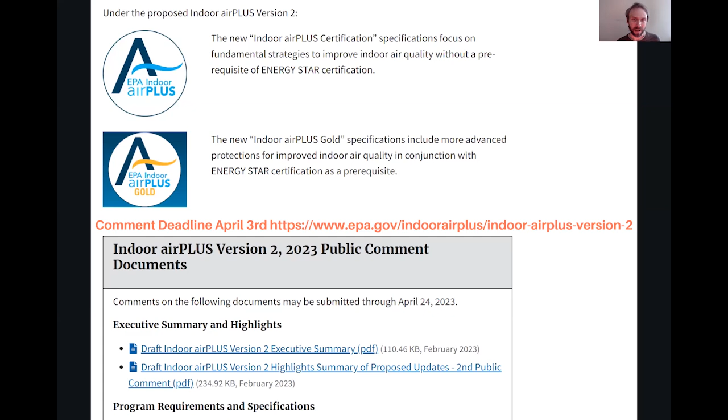And also that's going to impact achieving the DOE Zero Energy Ready program and achieving the Inflation Reduction Act dollars if you're trying to get those. So go make a comment and go learn about that now. And then also, as a reminder, in order to get Zero Energy Ready certification, you need to be collaborating with an energy rater, a certified energy rater.

There's 4 different entities. 2 of them are special in the country of California, if you will. And then the rest are national. And so you need to collaborate with one of these certified raters through one of these entities, depending on whether you're in California or national. And then also typically the builder needs to be certified as well, though that's a much lower bar than the rater, and we'll talk a little bit about that too.

Now, if you're utilizing these programs for the green certifications, such as LEED, one thing you'll note is that there is an addendum that had been issued several years ago through LEED that basically automatically grants 15 energy points to anyone who achieves the Zero Energy Ready certification program. And on top of that, they also grant several prerequisites that get met automatically just by achieving this certification, as well as additional points. So minimum energy performance, superseded, right? We meet that. Education of the tenant building manager.

There's a component of that built into Zero Energy Ready already. The efficient hot water distribution system is built right into the Zero Energy Ready certification program. Active solar ready design. That's what this program is all about. Having that credentialed HVAC contractor, again, the energy use, and then also you get an innovation credit just for achieving this. So there's multiple points there. And there's a few more as far as Indoor Air Plus, which we'll get into.

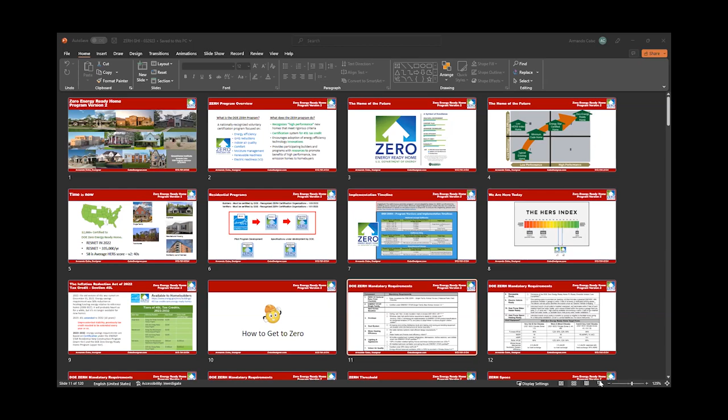So let me share a screen. Can you see it, Brett? There it is. I see. Well, I see all your slides. Yeah. Okay. So here, hold on. Sorry. Okay. Are we there now?

There it is. Okay. So my presentation slide actually is to tell folks that you can design a zero energy home for any climate zone, any style, any size whatsoever. Fortunately, for version 2, they took out the size adjustment factor. So now we can certify and register houses that are fairly large. So what the program is all about is energy efficiency, greenhouse gas reductions, indoor air quality, comfort, moisture management, renewables, and electric readiness, which is a big part of the new version. It also recognizes high performance.

Now with the tax credits that just got passed a few months ago in Washington, all the tax credits got extended, not only for new construction, but also for retrofit. So we'll talk briefly about all those things. It also talks about innovation. We get a chance to come up with new products, new ideas, new systems, new things.

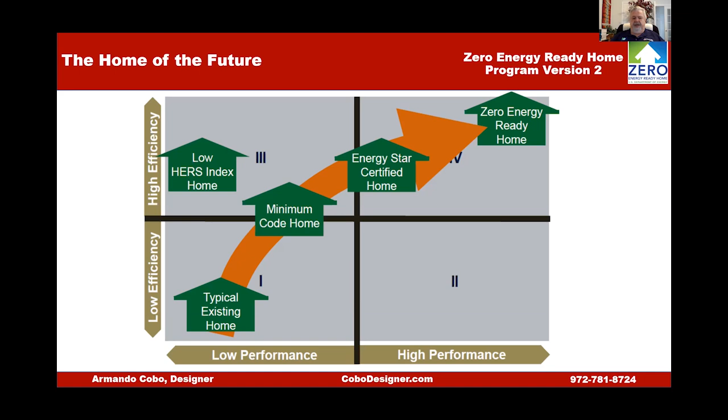So having said that, we're still looking for a better environment, a healthy environment. We're looking for more comfort. We're looking for advanced technology, being more efficient, have better quality homes. And of course, better quality homes means more durability. So we're trying to start with the existing stock that right now is pretty low on performance and efficiency, but we're trying to move the needle up and up and up, like most green programs. But I think we have a really good system with the Zero Energy home.

Last year, there were almost 12,000 homes certified to the Zero Energy Ready program. RESNET has come up that there's an average of about HERS 58 for all the scores, and Version 2 is now requiring to be in the 40s. So we can tell that new homes are getting better and better as we're improving the quality of the homes. The Zero Energy program is basically designed for single families and duplexes, townhomes. That's what it is so far right now.

As far as manufactured homes and multifamily, the programs are being developed, the guidelines are being set up, and so forth. So we're basically going to concentrate on the movement from Energy Star version 3.2 to version 1 of the Zero Energy program, and then also for now version 2. So we'll hold on manufactured homes and multifamily versions until they come up with those programs, and they'll have their presentations ready for that. So as we know, different versions are being applied today in some states.

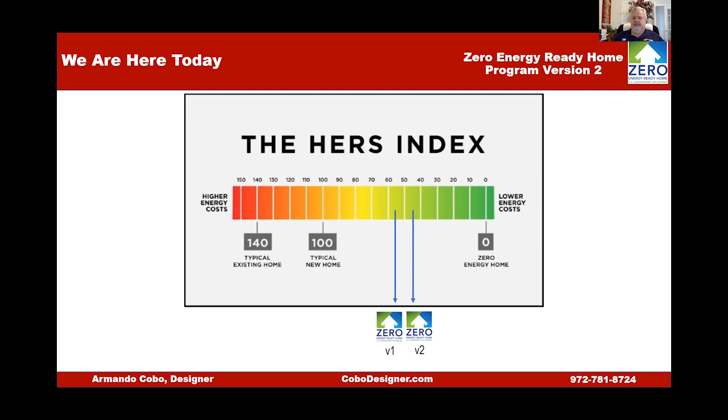Any program where the building permit is after next January of '24 needs to automatically go to version 2. So there are also similar requirements to California, and right now we know that the HERS score required for version 1 is somewhere in the middle of the 50s. And we're improving to somewhere in the middle of the 40s, from low 40s to high 40s. And so it makes it easy to get there.

As Brett said, some of you guys are already in the 40s. That's excellent. I vouch for people that do those kinds of things, because just doing the right thing, just sealing the envelope like we're all supposed to do regardless of what construction we're doing, you pretty much can get a HERS 40, and you pretty much can get below 3 air exchanges at 50 pascals. So just doing the right thing, we can get there.

One of the good things about the Inflation Reduction Act that got passed a few months ago was that in the old version, we had tax credits for energy efficient homes, and we also had tax credits for solar and renewables and so forth. Everything got extended 10 years. So there's no such thing like we had in the beginning, where it was only a few years and then it had to be renewed. So at least we know that we have 10 years for a full tax credit, and then it kind of fades away in year 33 and year 34.

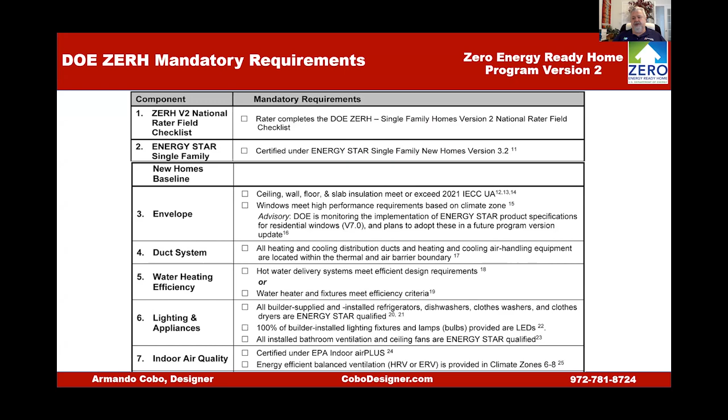If you happen to be designing and building a house in an area where there's high humidity, especially in the shoulder seasons when you don't have the air conditioning controlling the humidity in the house, having an independent, separate dehumidification system in a house is a big plus.

So renewable ready needs to be done there. You need to have also at least one electric vehicle charger ready for it. So those are things that we need to start thinking about as you add to it.

Here's the heat pump water heater ready that you need to have in a home or in the garage, an area specific for a heat pump water heater if you need to install it in the future.

Also the HVAC system improves in efficiency, in how much SEER or heat pump efficiency, the boilers and so forth. All these requirements, I believe the PDF was sent to Brett, and he should share it with each one of you. And if not, you can go to the Zero Energy Program website and download all the requirements that need to be done.

Again, insulation is also improved tremendously. You really need to pay attention to that, because now pretty much everybody's going to have to start using outsulation or rigid foam on the outside, continuous insulation.

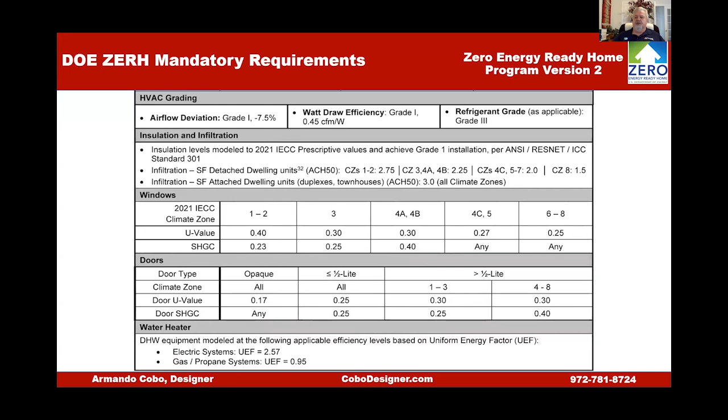Doors are also specified for what needs to be done. Here down below is water heaters for electric water heaters. And even if you still want to use gas, there is efficiency improvement for water heaters. All ducts in the conditioned spaces, and as I said, also lighting and appliances, it's all 100% high efficacy.

So in a nutshell, what is it that we're trying to do? We're trying to improve the building envelope. We're trying to improve moisture protection in a house. We're trying to improve comfort. We're trying to improve better indoor air quality. That is a huge thing.

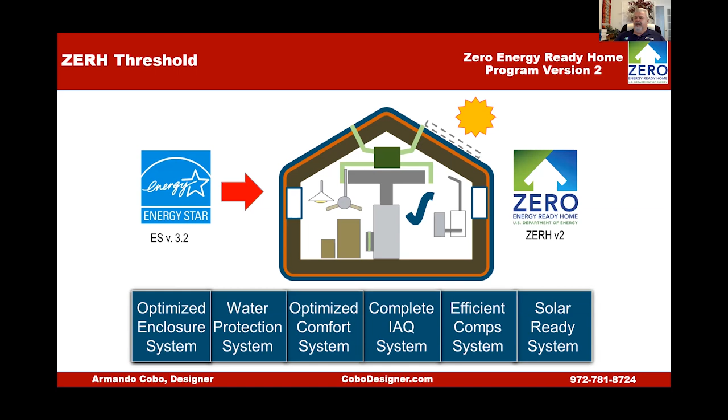We know that for the last 20 years, the rate of asthma in children has doubled. So that is a big thing. Efficient components on the rest of the house, and then of course solar ready.

So what we're doing is we're taking the Energy Star 3.2, we're getting to a tighter building envelope, and we'll see how tight we need to go in a minute, but we need to improve performance, and then we come to zero energy. That's how we need to do it.

We need to do a continuous air barrier, insulation barrier, thermal barrier, all that, all the way around the house. Again, the water protection, we need to make sure that we deal with better products, better systems on how to use it.

Pretty much every single house that I'm designing right now, we're using rain screens. There's different options for different products. I've always said not every good product is applicable to any installation. So make sure that you marry the correct product to the correct rain screen that you're trying to use.

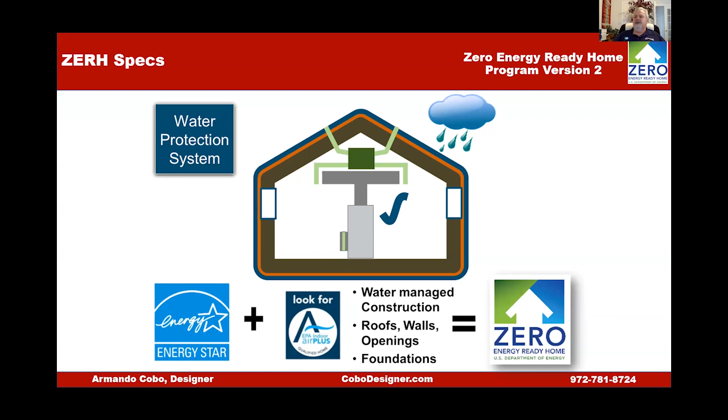Whether we use stucco, you may want to use Benjamin Obdyke's rain screens. When you're using siding, obviously you may want to use, say, 1x4 rain screen. So all those things, it just needs to take into account better sealing, better waterproofing, better management.

Again, appliances. We take Energy Star appliances. We use ceiling fans, exhaust fans, water heating. All this, we're going to use much more efficient equipment. We're going to add lighting. We're going to have hot water distribution. This is a big thing too.

Now we're going to have to start either bringing all the rooms that have water use, like bathrooms and laundries and kitchens, as close to each other, and hopefully we can use, say for example, a manifold. So in big houses, we don't have a choice. Sometimes we have to put recirculating pumps, and then that becomes now an issue.

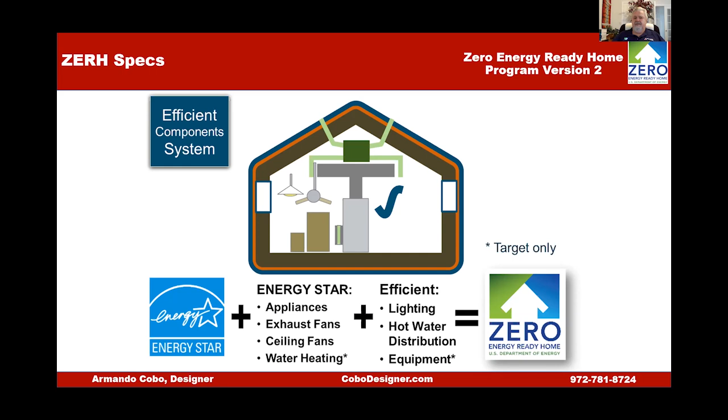What water heaters are we going to use? What water heaters work with water pumps, and do they need to be on demand or not? And so now it becomes that we're going to have to start thinking about what systems we use on the house.

Same thing when it comes to the renewables, whether we're using solar panels, whether we're using solar tiles, whether we're using battery systems, whether we're using generators.

Not all batteries can be charged with a generator. Not all batteries are the same - some you have to replace every 7 years, some every 10 years, some cost $5,000, some cost $20,000. So all those systems need to be figured out. What type of panels you're using on the house, if you're using a smart panel or not, if you need automatic disconnects or so forth - all these things need to be thought out ahead of time.

I actually have a thing I try to talk to my clients, the homeowners and the builders, about - before I start drawing a line on AutoCAD, I want to know what systems we're going to use on the house. It doesn't have to be 100% accurate, but it gives me an indication of what type of wall assemblies I'm going to use, what type of roof assemblies, am I going to use floor trusses, am I going to do a basement, a conditioned crawl space, a conditioned attic or a ventilated attic. All those things need to be settled before you start designing a house.

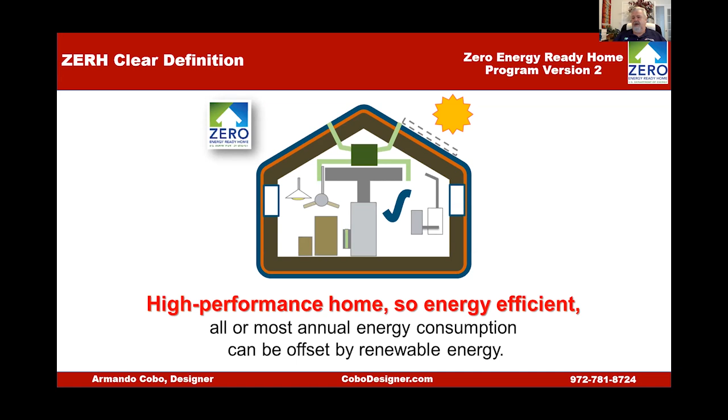One of the things I really like about the zero energy home is that it doesn't require a specific wall assembly or roof assembly - all you need to do is make sure it works for the program. And so this is where we're moving from and to.

Obviously, Energy Star started back in the late 90s. Energy Star 3.2 was just recently released. Zero Energy started about 10 or 12 years ago.

We're doing a house right now where the homeowners want four EV chargers. So you need to think about that, because each electric vehicle charger is going to be drawing somewhere around 4 kilowatts. Not that you're going to run them all at the same time, but there could be the possibility that at some point you may need to. So you need to have all the power available for those requirements.

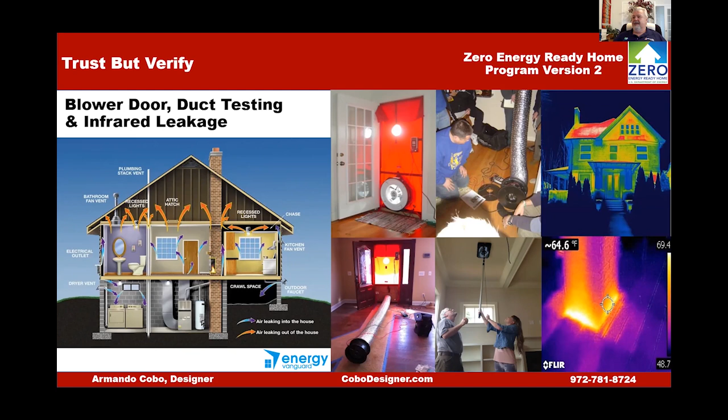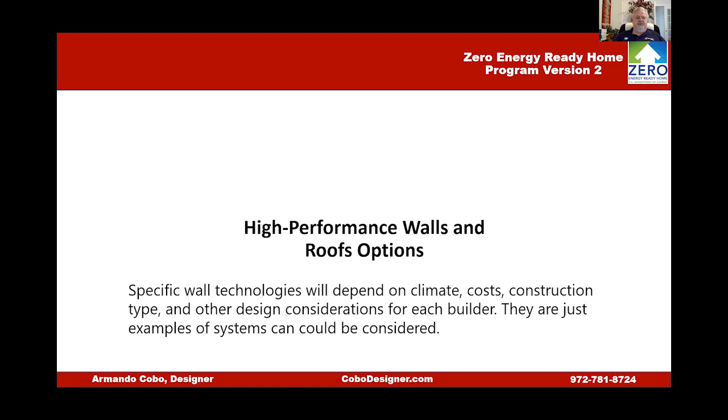So what are the options that you have? Here we're going to show different typical wall styles that are used around the country. Doesn't mean those are the only wall sections you can use, but probably the most common one is 2x4 or 2x6, 24 inches on center, using rigid foam insulation on the outside.

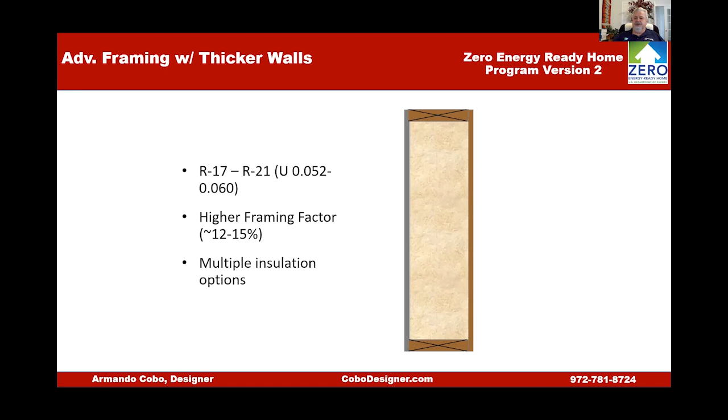You can also use 2x4 stagger studs on 2x6 or 2x8 plates. You can use insulation in the exterior sheathing - having continuous insulation is the way to go. Take a 2x4 or 2x6 wall insulated only on the inside - by the time you add the framing factor, instead of having an R20 or R21 wall, you only have an R14 or R13. So continuous insulation adds anywhere from R4 to R7 on the outside of the whole assembly. This is the typical insulation that goes into a 2x wall, whether 2x4 or 2x6. The framing factor reduces the R value of the wall.

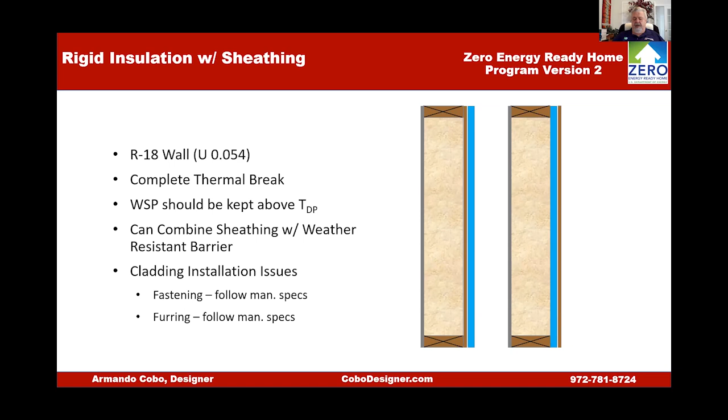Another common way to do it is to use structural insulated rigid foam. It allows you to have that rigid foam on the outside, but then you need to have some bracing included into the wall, which adds labor and so forth. I happen to like the system with rigid foam on the outside of the sheathing. Some folks, and it's becoming popular, use products with rigid foam inside of the sheathing, but to me, structurally, I just feel better having the OSB or plywood on the warm side of the wall.

Also, using structural insulated panels is a common system. I don't use it hardly ever - I tried it for a few years. It's a good system, but you really need to use specialized installers, guys that know what to do, who've dealt with the system for years, day in and day out.

Any type of leaks becomes a big issue later on. So to me, it is a good system, but you really need to use people that specialize in the design and installing of the system.

The same thing with ICF, insulated concrete forms. It's a great system, and if money is no object, it's probably one of the best systems that you can build a house with. It usually costs quite a bit more than what the salespeople tell you, but it is a great system.

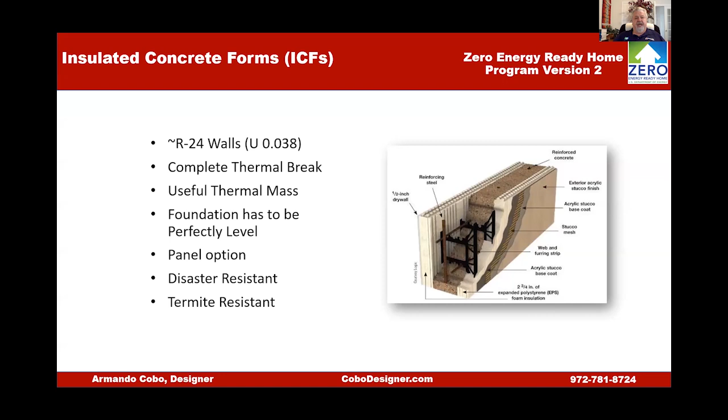Again, you really usually need to use contractors that are specialized in this. Even though some of these manufacturers say that anybody can do it, that's just like anything else. Sometimes good products with bad installations make a bad decision.

So double stud walls are fairly common in the Northeast. We don't see that much down here in the South. I don't know much about it other than what I read in websites and books and so forth, but it is a good system as long as you build it correctly.

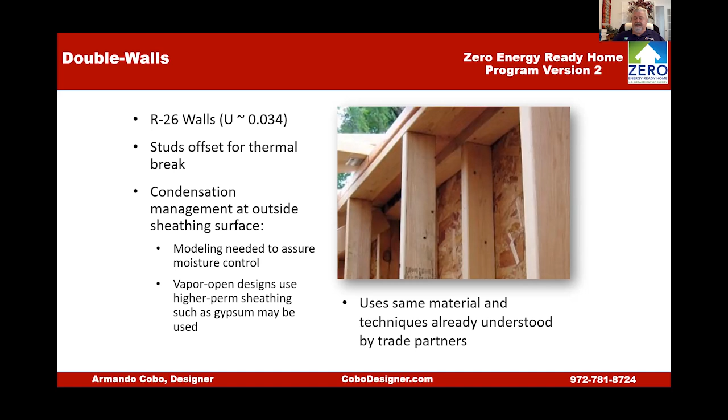So there are different options that you have for walls, floors, ceilings, roofs, all that. As long as you do it right, as long as you plan ahead, the moisture management, the permeability - I know that many of us cannot afford to use WUFI analysis on every project, but ASHRAE Fundamentals is something that is available to anybody and it is free.

So why don't you really pay attention to what type of systems you're using on a house, especially on custom homes. Make sure that you're using the right product for the right application and the right installation instructions.

Heel framing - the codes are now jumping quite a bit. In climate zone 0, which is probably in the Caribbean or somewhere, and South Florida is climate zone 1, they stayed at R30 in the ceiling. Climate zones 2 and 3 have jumped from R38 to now R49. Climate zones 4, 5, 6, 7, and 8 are R60.

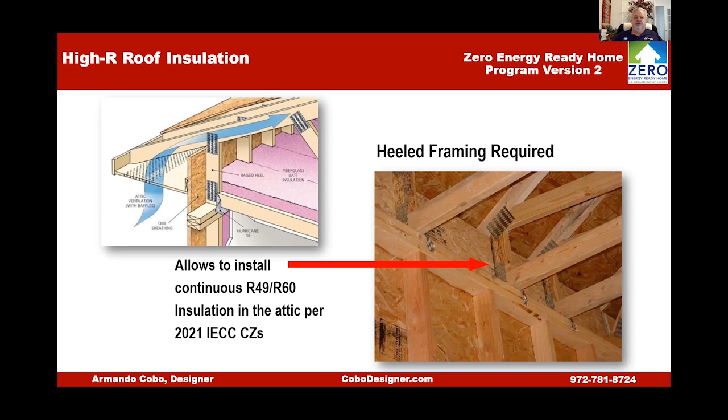Even if you're trying to do continuous insulation, where if you're at R49, continuous insulation will bring you to R38, or if you're at R60, continuous insulation is R49, you still are going to have to use heel framing. I believe the code needs to address this on roof framing, that pretty much every single roof we do today needs heel framing.

This is what I was talking about. So it's pretty important to know now, especially starting in climate zones 4 and higher, think about this.

Just for condensation value, the impermeable insulation that we need to use starts at a minimum of 3 inches, and every climate zone it goes up another inch. So if you're in climate zone 6, you're looking at 5 inches of rigid foam on top of the roof decking, or closed cell foam sprayed under the roof decking if you're using a conditioned attic type of assembly.

So I'm always thinking, what is the labor pool that I have to make a decision of what type of attic or roof assembly I'm going to use? If I have a labor pool that is educated and can follow instructions, I don't mind putting 6 inches of rigid foam on top of the roof decking if I know they're going to be conscious about that installation. But if I know that here in the South, we get a lot of turnover on framers that 99% of the time are not going to read the details that you put on the plans.

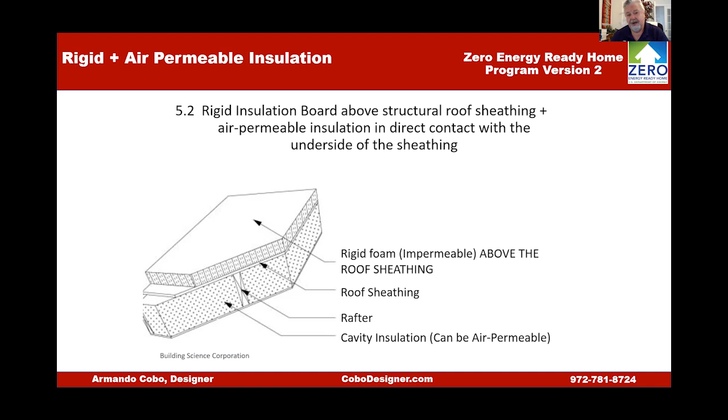We started using it down here, but you also need to make sure that the subcontractors that we work with are people that know how to follow the code and know how to follow installation instructions. Okay.

Here are some of the things that we know. In the 2018 code, there were 3 air exchanges at 50 pascals for most of the country. That has since been downgraded to 5 air exchanges at 50 pascals in the 2021 code. Having said that, one of the requirements I have on all my projects is 1 air exchange at 50 pascals. That is maximum. And so doing the right things will always give you better protection for your clients.

And one of the things that we do is make sure that we seal the plates. We don't use the little thin sill sealer at the bottom. We use really good sill sealers. We use tapes on the outside. We put details on the drawings for those things to be addressed. Unfortunately, very little happens in the field.

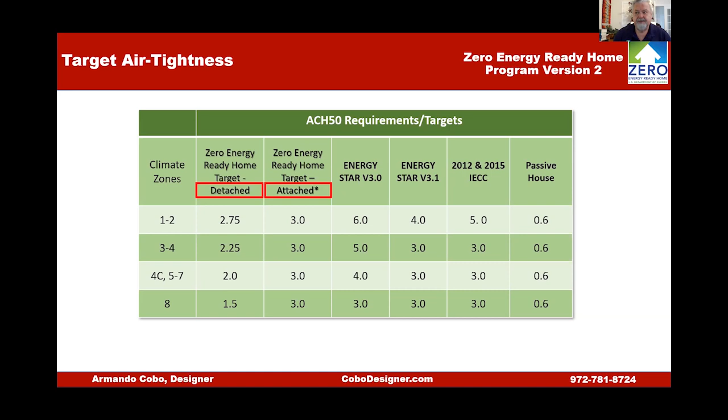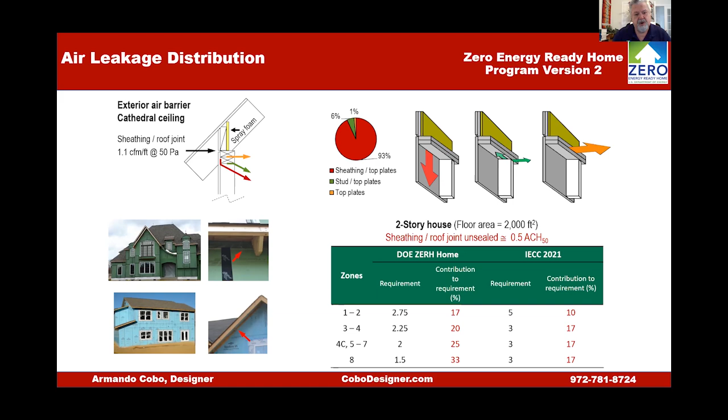Again, not only the sill plate, but there's also a lot of air leakage that happens at the top plates of the house. So we need to address that. And there are minimum requirements for each climate zone that we also need to address.

Here are some of the typical systems that we use. I happen to like very thick sealers. There are 3 or 4 different brands out there that you can use. Protecto Wrap happens to be the one that we use the most. It is a company out of Denver, Colorado, and they do a great job offering different types of sill sealer that really do seal the envelope correctly.

But you can also use caulkings, and there are different ways to do it. But obviously, people are using a lot of air barriers nowadays. But you also need to know that for an air barrier to work, the holes need to be fairly small. And so no big holes are allowed for that system.

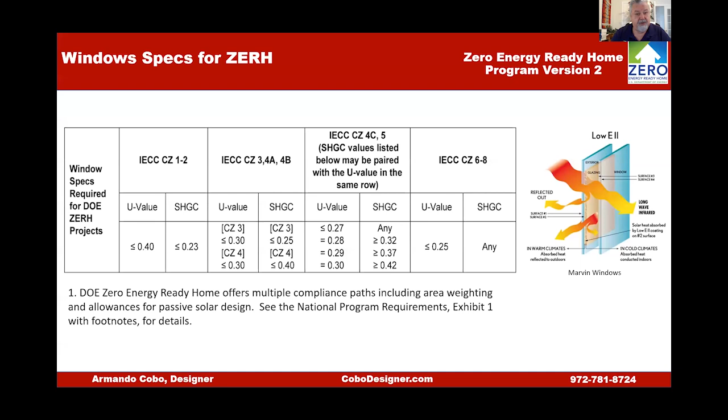So water management is probably the number one thing that we all need to address on a house, making sure that you design your roof assembly and your wall assembly with the correct products, the correct installation, the correct methods. As I said before, a good product with a bad application or a bad installation just creates problems. So you need to start out by making sure the house is dry on the ground. And if you do crawl spaces or basements, obviously there are ways to do it right.

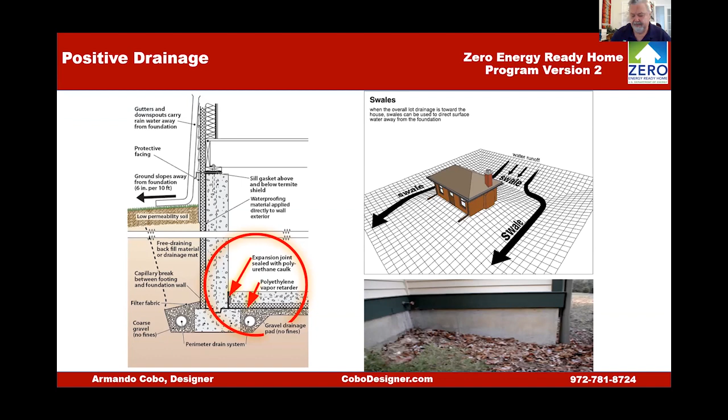A long time ago, in my previous life, I was building houses in the Midwest, and every house I've ever built had basements, and so we designed houses with interior and exterior drains, drain pipes going to a sump pump. So those are things that you must do. And a lot of times I see details with no drainage whatsoever on a basement or a crawl space. So those are things that we need to make sure we follow through.

Same thing with how we do flashings, whether it is on a roof or on a fireplace chimney or two planes coming together, and so forth. And there's plenty of materials to do rain screens, as I was saying before. You can use HomeSlicker or Slicker Max if you're going to do stucco. You can use 1x4s, and I see a lot of questions about whether these 1x4 rain screens need to be done with treated lumber, and they do not. Just because if one 1x4 gets wet, being that it is vented, it'll dry itself out.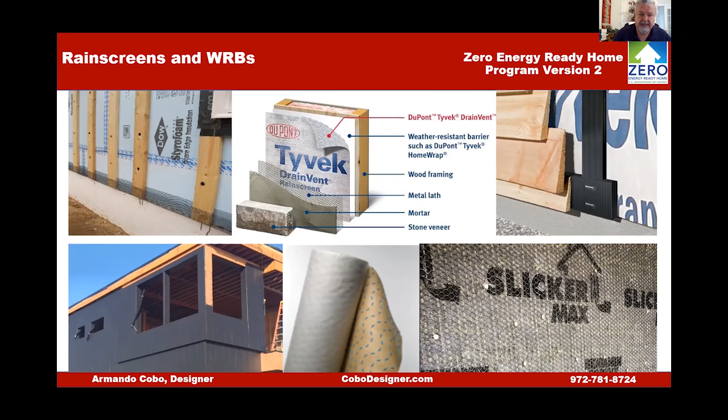Another thing is you need to make sure that you install insect screens on all the openings, whether you buy 36-inch rolls and cut them in 12-inch sections, or use products that are already manufactured. They're not cheap, but they're great products to use. Cor-A-Vent is one of those beautiful products. Another thing we're starting to use more and more is spray-on water-resistant barriers. So those are things that you need to start designing up front with the builder: what system you're going to use, what's more available in your climate, what type of subcontractors you can use in your area.

So duct system, it is required now that you need to have a design. Well, the code requires design Manual D, S, and J. So the thing is that when you take that to a building code, I have never seen a building official review that. 9 out of 10 times they don't. I would say half of the time they don't even know what to look for.

And so having somebody design the system correctly, I happen to have my own, I can do my own design of the system, but because I'm not a mechanical engineer, I'm not going to put myself in liability for that. But I use that to review every single house I design. I review all 3 manuals. I want to make sure that it was designed correctly.

And believe it or not, I had a builder a couple of years ago that sent me a summary, and it had the right address, and that was the only thing in there. Because for a wall section, we had 2x6 dense packed cellulose and 1-inch rigid foam on the outside. What I saw in the summary was 2x4 with batt insulation. From then on, it just had the wrong windows, the wrong amount of windows, the wrong insulation, the wrong everything.

If you can use the trunk in metal, and the supply branches, you can go up to 10 or 12 feet with a stretched out flex duct. That's the best way to go. By the time you turn to the boot, you need to use a metal turn, so there's not a kink or blocking the airflow. And as I said on a picture earlier, you need to make sure that you do airflow testing to make sure that whatever you got in the Manual J for that particular room, that's what you're getting in reality in there. And we happen to do that on all our houses.

So you got 3 commissionings. One when the rough-in is installed, one when it's finished, and one you go about 6 months later. Because sometimes homeowners will put a piece of furniture. I typically like to have all the supplies up high, coming from the ceiling or high on the wall. But now and then, you get one that is designed where the supplies are in the floor, and sure enough, somebody will put a piece of furniture on top of that. So you need to make sure that you do some commissioning after your clients moved in.

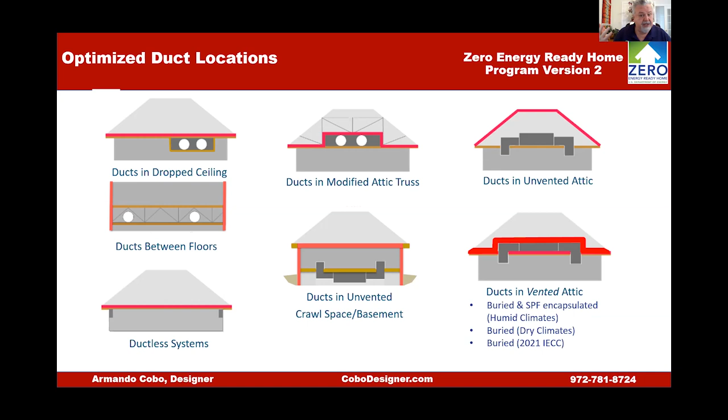Sometimes we do, especially on high-end houses. It looks like down here, sealed crawl space is the way to go. If you also have a basement, it's a great place to put all your mechanical equipment. Design the floor trusses with chases, so you can use a trunk and branch. It's a really good system. Okay, so there are different ways.

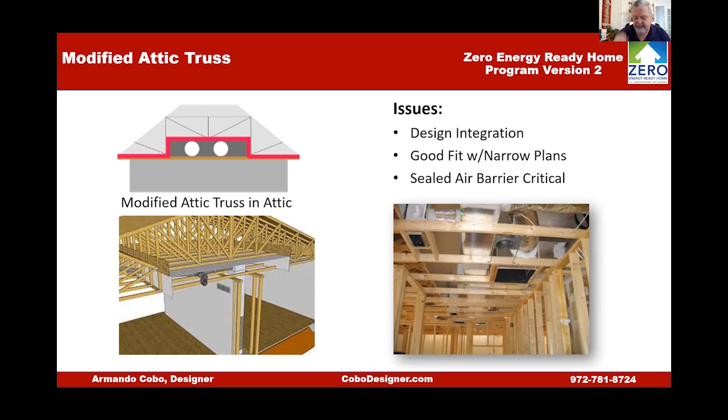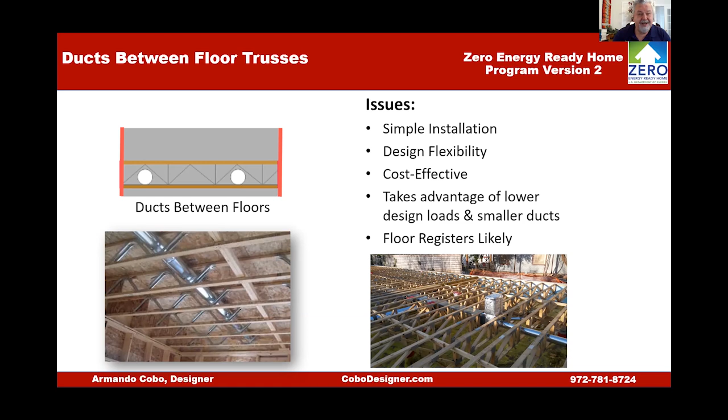This is a crawl space, bottom right, that I designed with the metal trunk going right down the middle and supplying the house. It's a 37 or 3,800 square foot house, and we use one system, a 3-ton system. The owner is a retired mechanical engineer, commercial, and he had 9 tons of air conditioning planned for this house. I reduced it to 3, and he didn't think I could do it right. Proved him wrong, so he's happy with 3 tons.

Same thing with conditioning attics. It's a really great way to do it, and you put all your equipment up there. It's what is called the southern basement, or conditioned crawl space.

There are exceptions for a crawl space. So if you're in a 100-year flood plain, or in a marine or dry climate, raised pier foundations with no walls, like New Orleans for example, or coastal areas, sealed with capillary breaks and dehumidification. So there are some exceptions, but other than that, you need to condition the crawl space.

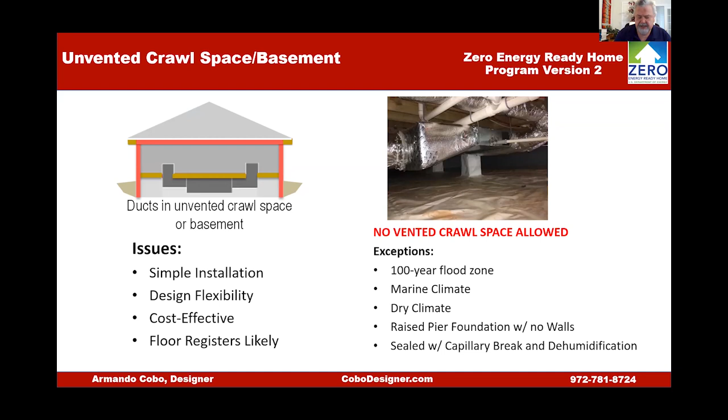Great system, though. Again, you can use ducts in the vented area, but they need to be encapsulated, and it can only amount to a small length. You can't just do the whole system like that.

Indoor air quality - I'm sorry, I just looked at the time, so I'm going to move quite a bit faster. Indoor Air Plus is now mandatory with the program, and it's about making sure that our houses have good ventilation.

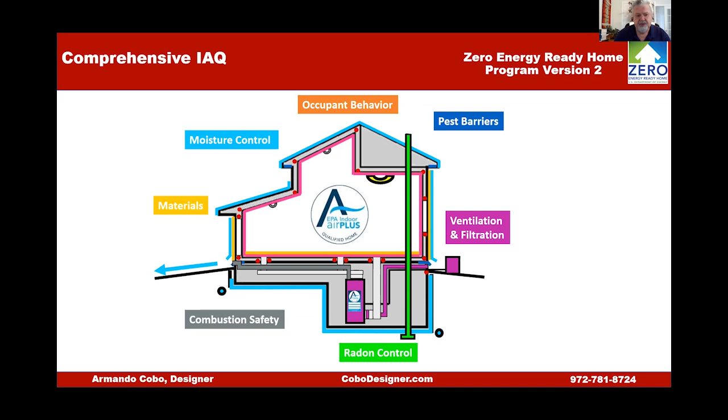We provide pest barriers. We control our moisture. We make sure that we select the right materials with the right application.

We need to provide radon solutions, passive or active, depending on where we live. Sometimes you could be in one of those counties that looks red on the map, but the area where you're building isn't. Or I've done houses in Texas where it looks like we're in zone 3, but in that particular place where the house is, we need to do radon mitigation.

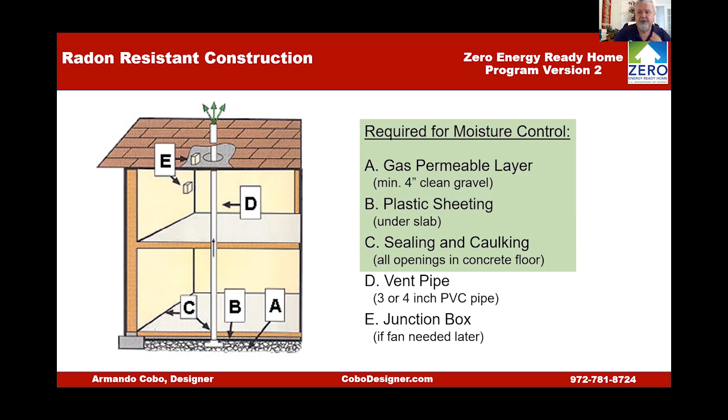So it's a simple way to do it. Passive way, you can put a stack tied to the drain tile of the house. And if you're in zone 1, maybe you need to put a fan in the attic that helps suck the radon out of the house.

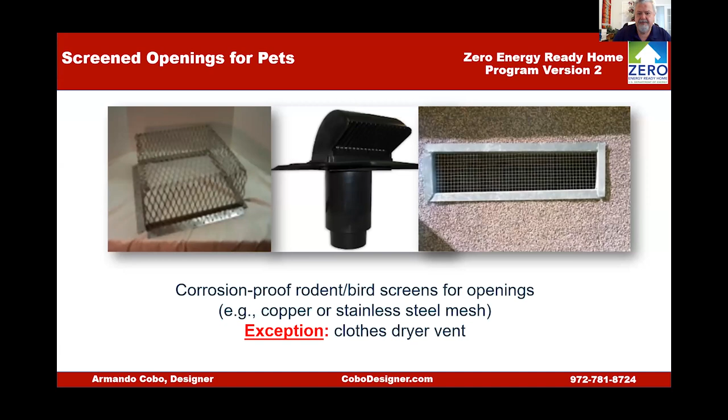You also need to make sure that you screen all the openings from pests. You need to use low emission products, and there are different certifications for products used in homes.

I have not used or designed an open flame fireplace in the last 20 years, and I do a lot of multi-million-dollar houses. The idea that big houses don't want a direct vent fireplace - some of the ones that my clients choose aren't cheap, they're pretty fancy, but we're using all direct vent fireplaces or electric fireplaces.

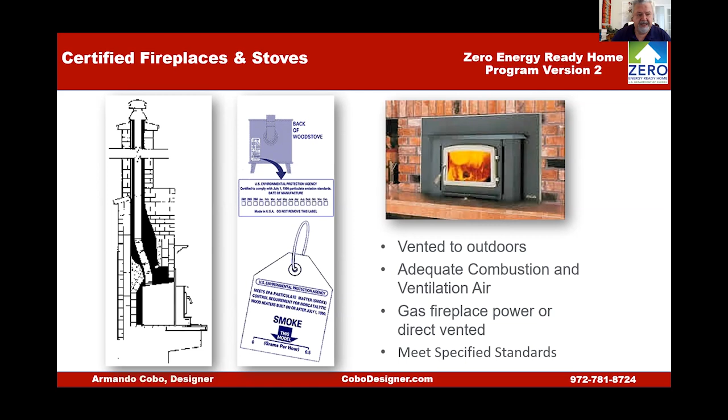On the inside of the house. On the outside, we can use regular masonry or isokern or some other product like that. Now, you're also allowed to put gasketed doors and so forth, but personally, it's a red line for me to have an open flame fireplace.

Obviously, now you're required to use smoke detectors and CO detectors if you have open flames. That's the beauty of an electric house. In some areas, especially multifamily, you're not allowed to have smoking on the inside.

You need to be aware of what people store in the garage. I design all my garages with a fan hooked up to the garage door opener, so every time the garage door goes up or down, it runs the fan and removes any chemicals or smells from the car when it comes in. You can set it for 20 or 30 minutes, then it turns off.

It's a good thing to do. Make sure you have gasketed doors and seal that house completely. I've seen some guys on high-end homes completely sheathe the house separate from the garage, then add the garage after sheathing that wall. It's a great idea - I don't think it costs that much money, but it ensures it's well done.

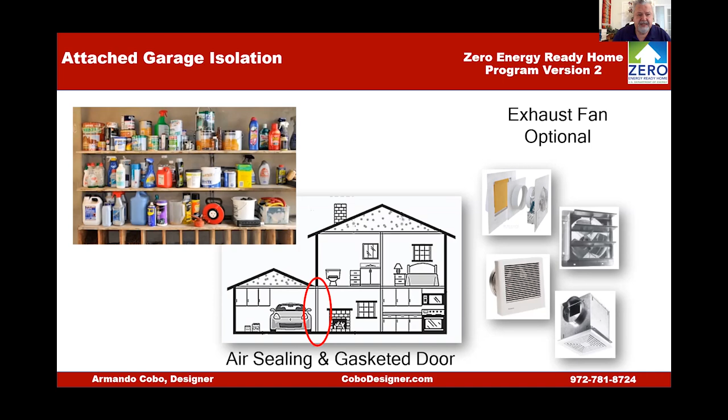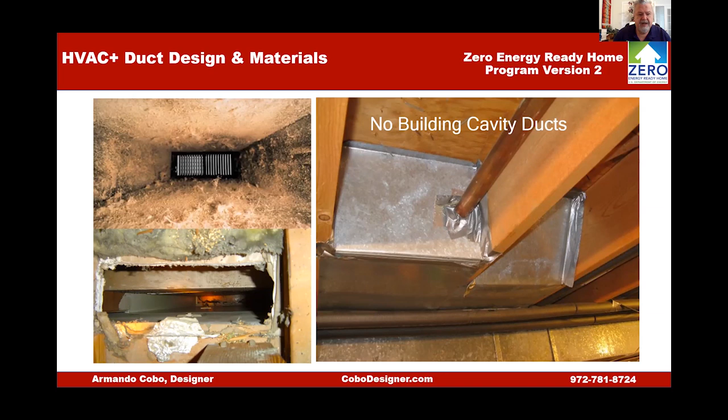Same thing, no air handler in the garage. It is now required to be in the conditioned space for the Zero Energy program. And not using the building structure itself as a trunk - that was used in the past, but not anymore.

The program requires minimum MERV 8, but I think pretty much most people, especially now after COVID, are using MERV 11 and MERV 13s. We happen to be using quite a bit of 16s. You need to plan for that because that creates more static pressure in the HVAC system.

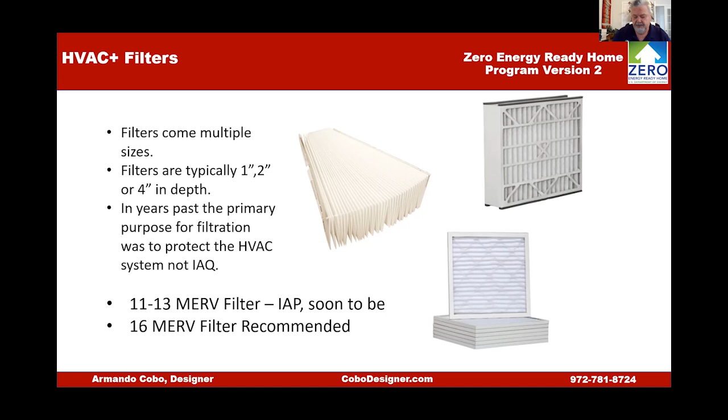Some of the ERVs and HRVs don't have a way to add a high MERV filter, but that's all you can do. As far as the HVAC system, I highly recommend that you plan for a MERV 13 minimum, and hopefully MERV 16. But you need to plan for it and make sure that's part of the equation when you design the system.

Again, ERVs or HRVs - if it's a small house, we use spot ERVs. They're just easy to install, minimal ducting that needs to be done. You put them on the ceiling and just let it go. If it is big houses, in some cases we use 2, sometimes 3 or 4. So it's really a good way to have continuous ventilation on a house.

Armando, are ERVs actually required, or is even balanced ventilation required on Zero Energy Ready? It is not a requirement, it's not mandatory, but to me, it's the only way to ventilate a house. I know that the code allows exhaust ventilation and supply only. The problem with exhaust is that you put negative pressure on the house. And so when you put negative pressure on the house, any type of bad stuff from the outside, or the soils or the cars or the chemicals or whatever, comes into the house.

When you have supply, the problem with supply is that when you're in the shoulder season, and if the system is not working, you're not getting mechanical ventilation in the house. If you are in a very humid area, then you got problems now because you are bringing humidity. If you're in 100-degree weather, you're bringing hot air. If you're in 0-degree weather, you're bringing cold air. So all those issues are happening with supply only. So to me, having a separate independent ERV or HRV - I don't use HRVs, but using ERVs as an independent system is the way to go.

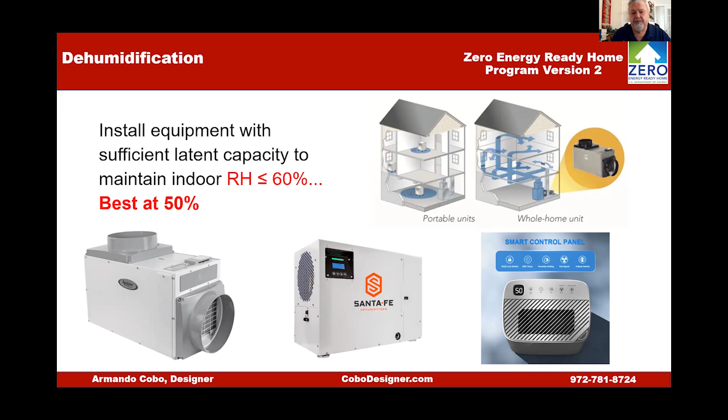The good thing about it is that now pretty much every system that you can buy comes with an app that you can control the system. That is good and that is bad. The good thing is that you can control it. The bad thing is that people don't know what they're doing. And if you have a system that is not designed and installed correctly, you're making it worse.

So also, there's all kinds of indoor air quality smart devices that you can add to your house. Broan, Swidget, Neutron - all these companies are coming out now with indoor air quality sensors that check the moisture, check the temperature, check the indoor air quality, pollutants, all kinds of stuff. So those are things that we're starting installing in a lot of our houses, and they don't have to be that expensive. Some of them are very reasonably priced.

Yeah, and it's interesting - I was just pulling open the new version of Indoor Air Plus and surprised to see that balanced ventilation ERV still not required, even under the new version, at least for now. So people can still get their comments out there. However, ASHRAE 62.2 2019 is required. That's a lot of air needing to be moved. So trying to move that with just a bath fan or a supply only probably is going to be a lot.

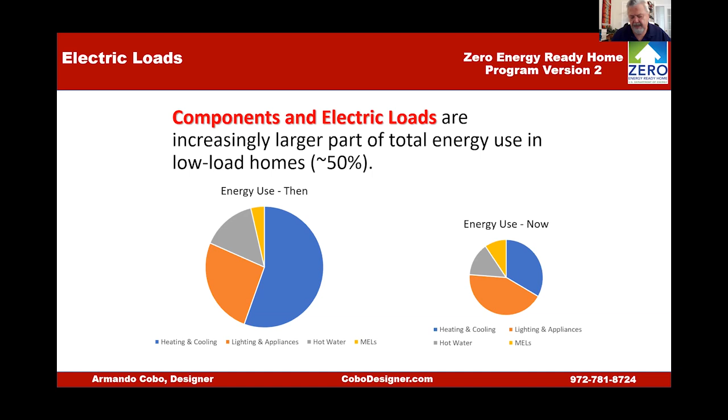This is what I was talking about with energy use—the difference between older houses and high performance houses today is amazing when you look at the Manual J's, and where your electricity usage is switched to and from, so you can manage it a lot better. As I mentioned, there are smart panels that let you control whether sections of the house can be shut off.

Smart panels let you shut off sections of the house completely or part of the time, while critical areas like a refrigerator, freezer, air conditioning, or heating stay on 24/7. That works really well, especially if you have renewables installed, because it gives you a great way to manage your electricity, especially in an emergency, or if you have batteries or even a generator.

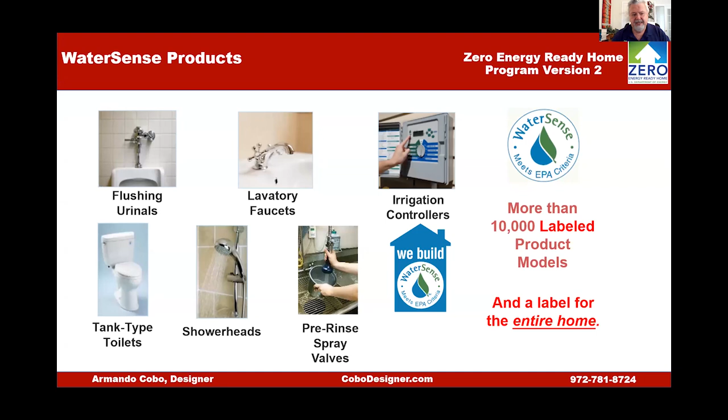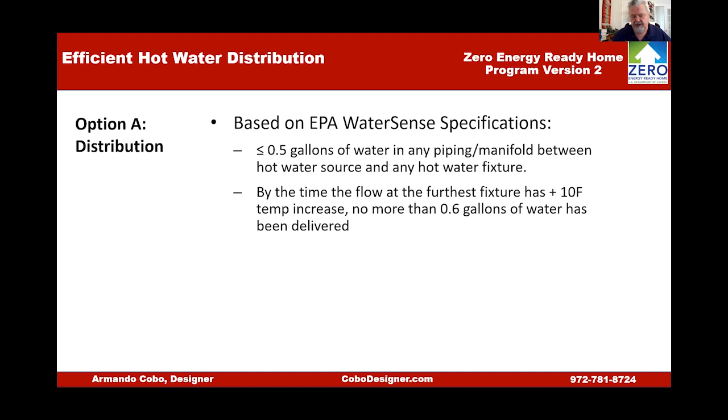For WaterSense, people are becoming more familiar with all the options now available for low flow toilets, faucets, and shower heads. But now it's required—based on WaterSense, you have different options for how to build a good hot water system.

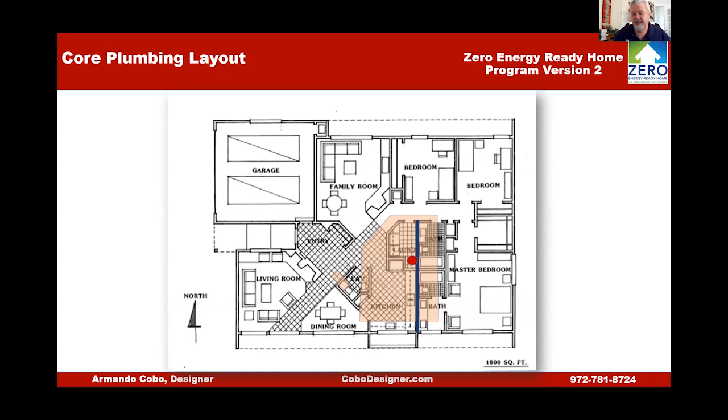If you can design all your hot water terminals in a very short space, a manifold is a really good system to go with. If you're in a small house that only needs one or two lines, that's also a good option. For me it's difficult because most of the houses I work on are pretty spread out—5,000 to 10,000 square feet—so we end up using a recirculating pump. But I don't think it should be on a timer. With a recirculating pump, you can use a timer or on-demand, and I happen to like on-demand a lot.

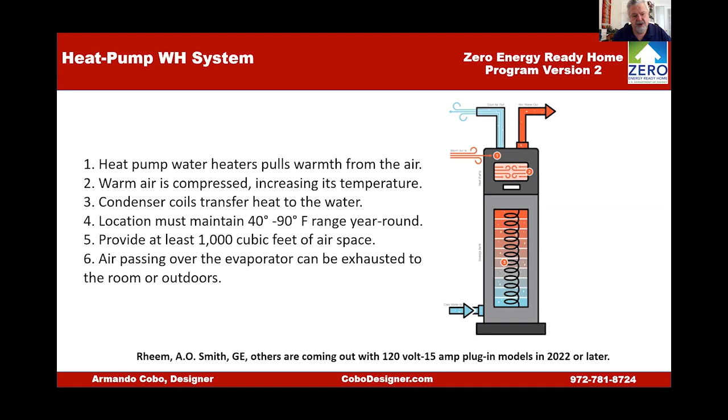Heat pump water heaters work just like an air conditioning heat pump—they use the same principle, pulling air from the outside. They don't work as well in cold climates unless the heat pump is located on the inside, so make sure you check how it's designed. A lot of people say these don't work as well with recirculating pumps unless you add on-demand to those water heaters. So make sure you do the research ahead of time, because otherwise you may end up with clients getting cold showers—it just takes longer for the water to heat up with these heat pump water heaters.

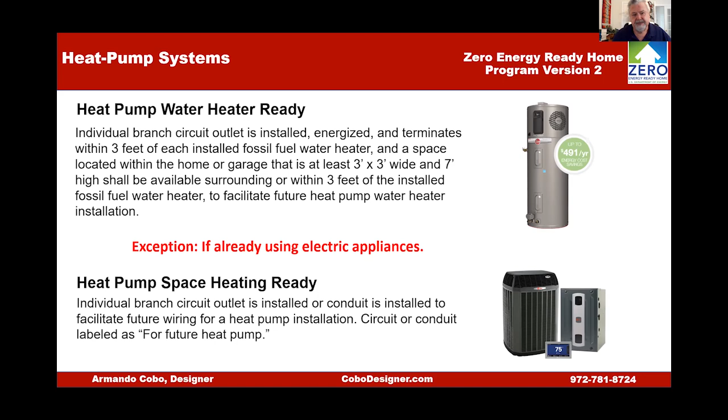Now there are combination heat pumps that handle not only space conditioning but also water heating, which may be an option for some folks. There are other options too, as long as you use a higher efficiency water heater—even regular electric water heaters now need to be WaterSense labeled.

Also, make sure that you have shower heads, faucets, everything else. You can also store water. There's water distribution systems now that they all need to be very well insulated, and I guess using a trunk and branch, kind of the same thinking, the same theory of what you do trunk and branch on the HVAC system. Think of using trunk and branch on a hot water distribution system.

So there's WaterSense and their website. They have a tool that helps you design the systems that you put on a house, and it can tell you whether it works or not, or whether it will be accepted by the WaterSense verification process or not. So you need to go there.

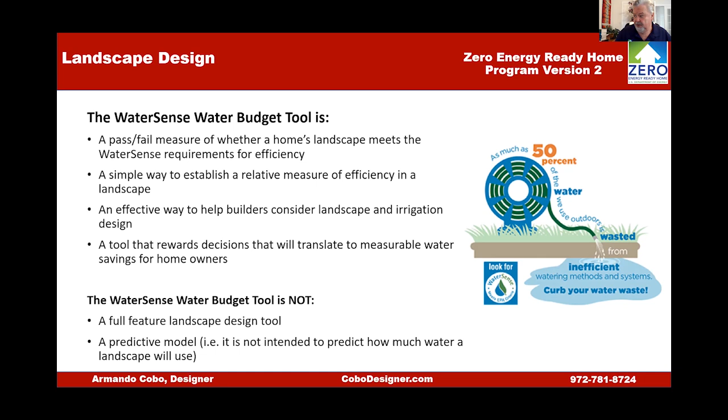Solar ready. The cost of solar ready is going down. So today, a lot of the houses that I design are so efficient without solar that the homeowners are not installing solar. I think probably about a fourth, 1 out of 4 houses that I design install the solar panels or solar roof. We're doing right now, I'm doing my first Tesla solar roof system.

There's quite a learning curve in there. You got to use, they do all the design. They'll do everything. I told them I'm going in there like naked, knowing nothing. They just design it. The price keeps going up, I don't know, I guess as the weather goes up or down, the price goes up and down. It's very... makes me nervous. But anyways, the homeowners are happy. They like it.

We're putting a 36 kilowatt system with 5 batteries and also a generator. So one thing I learned is Tesla batteries, they do not get recharged with generators. I think they're working on that because that's a downside for them.

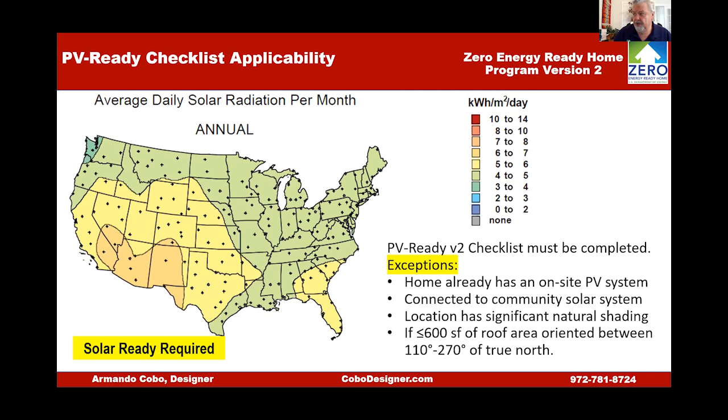So now the whole country is available for installing solar panels. You need to think about what system you're going to use. If you're using solar panels, that's one way to do your system. If you're doing solar tiles, it also matters what system of tiles you're using. Like I said, my first one is now with Tesla, and it's fairly complicated. They have their own system, whether you're using batteries or not, whether you're using a generator or not, whether that generator can supply direct to the house or charge the batteries. It's another system.

So those things need to be thought out up front. You need to have an area in the house or outside where you install this. All the systems are ready to be installed outside or inside. Most of the time we install them inside the garage. You need to make sure that you have the garage wider than where the cars are going. If you install it on the back wall of the garage where a car can hit it, municipalities are asking that you put bollards in there so somebody doesn't by accident smash into the system. So I tend to design the garage wider, so we put the systems on the side. Those are things that you need to start thinking about.

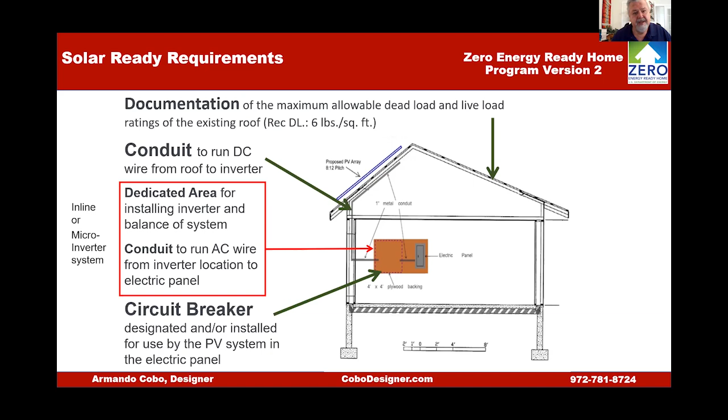As I said in the beginning, if the homeowner says I'm going to install a system, or I want a zero energy ready house, plan ahead, because eventually they're going to put that either inside the garage, or if you put it on the outside, or in an additional building, you need to address those issues.

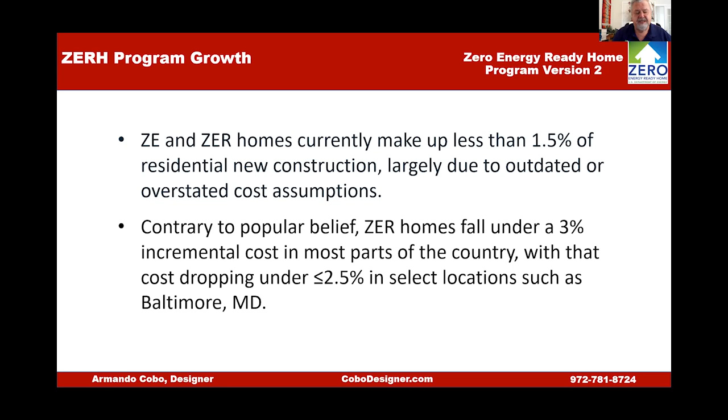The economics for homeowners or for builders and homeowners who think that these houses cost an arm and a leg, and they do not. The Rocky Mountain Institute in 2019 came out with a study. They looked at the top 50 markets in the United States at the time, and they figured that it costs somewhere around 3%. Now, this is the average size house. Most of the custom houses I do, they blow this out of the water, just because of the amount of high-end materials that they choose. But the typical house is less than 3%, okay?

I've got a couple of builders that I've been working with for quite a while, and they build it for the same cost. And so it doesn't cost that much more. What really adds, especially in the custom homes, is the selection of materials, flooring, cabinetry. Instead of paying $100 a square for shingles, their roof may be $1,500 a square, so that's the difference.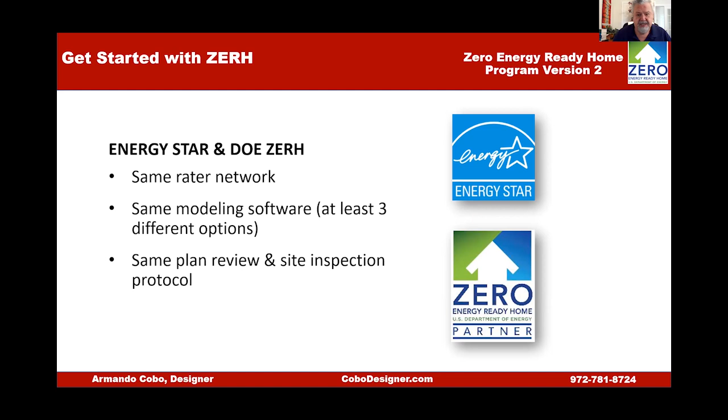So go on the program and find out what you need to do to get certified to do these projects. And that is basically the same people that you use for Energy Star. You can use them for Zero Energy as far as inspections and doing the verifications. There is already marketing material that you can use. You can use their logos. You can use their brochures, and their brochures are kind of cool because there's an area where you can put your logo in there, and that's it.

Send it to Kinko's, or I guess it's FedEx now, and have them make the brochures. It's just that simple, that easy. Same thing you can do for the different marketing materials that they have there. The message is already done. Like I said, there's videos that you can incorporate in your websites or in your material. Like my emails, they all have at the bottom a video link for Zero Energy homes.

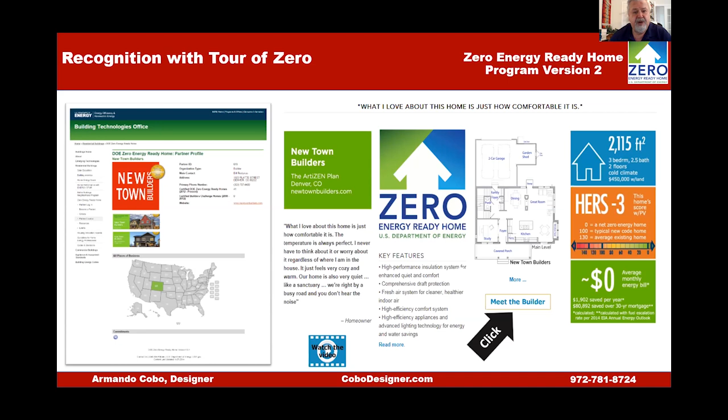And people go there. Right now, I'm doing 2 houses south of Houston because folks found me on the DOE website. So, hey, that's free advertisement. I didn't pay for anything. Once a year, they do the EEBA conference, and in there they give prizes to the folks that have won awards for different projects, zero energy houses in the country. And a couple of my builders have received best houses of the year in this award.

If you've never been at the Building America Solution Center, you're missing out a lot. There's a lot of information in there about how to do things right. And it's free. It's right there on a website that you can take to the job site. And if you have a sub that is trying to figure out where do I need to put this caulking, or how do I need to seal this wall, right there there's all kinds of details and information on how to do things correctly.

So buyers are getting smarter. I was talking to Brad a little while ago, that I have clients that are doctors. They know more building science than the builders, and they know what a HERS score is. They know how many kilowatt hours a typical house uses, and that energy efficiency in the long run pays off. Typically, a zero energy ready home, you can return on investment in less than 3 years, or at least that's my case with my clients.

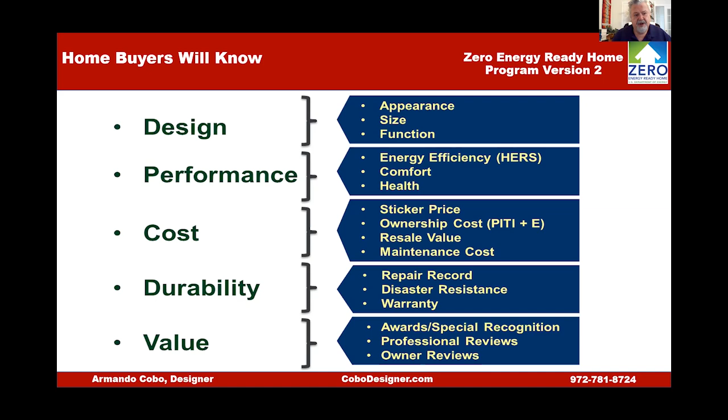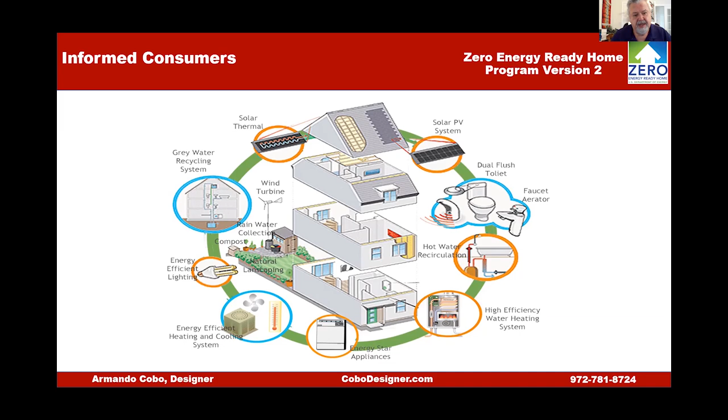And so folks know about this stuff, and they know that the house is a system now. You can't just pick and choose, we're going to do this, we're going to do that. I always tell my clients, if you can afford what you think you can afford right now, let's reduce the square footage by 10%. And in that way, you can afford to pay for a full house the way it should be done.

The other thing is there's bragging rights. There's a lot of programs out there in the country right now. I happen to believe that Zero Energy Ready Home is a great program. It is known that houses that have these systems are getting appraisals somewhere around 10% higher than others. So by not following these guidelines, you're leaving money on the table. That's my opinion.

This is a typical house that I do. Every single house that I design follows zero energy ready guidelines. Every one of the houses also follows the guidelines of universal design. They all follow the guidelines of the healthy house. They also follow guidelines of fortified home, depending on what area you're in.

There's a goal on the front page of the plans. It's a big thing that says we're going to try for one air exchange at 50 pascals. It's also right there on the front page that we're going to try for a low HERS 40. And this is minimum. We typically do better than this, but this is minimum.

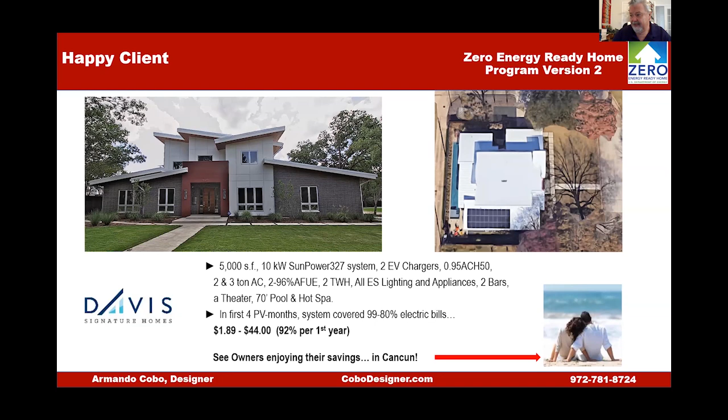Everything in this house is like a modern art museum inside, and it has 2 bars, a theater, a 70-foot pool, a hot spa. And so even with that, their first year, it covered 92% of their energy bills. Here's a copy of their first bill. You can see up here at the very top that it has $187. That was before they hooked up all the panels and everything.

And then just in the first month, they went from 187 to... I think, like I said, they covered 92%. Some bills were $40, but some were none.

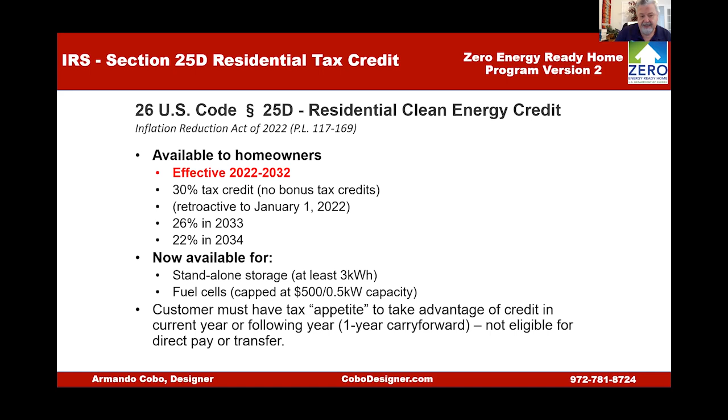So part of the tax credits, the Inflation Reduction Act, as I said in the beginning, was also extended to the year 2032. And so you have 30% tax credits, and it is retroactive to the year '22. In '33 and '34 it decreases, but at the end of the day, it's a great tax credit. If you build a house that is super, super tight, like I said, some of my clients don't install the equipment. They just think that eventually they will when it goes farther down in price.

So my advice to you guys is design your zero energy homes wisely. You need to figure out everything, or at least as much as you can, before you start designing the house. Make sure that you have details on the drawings, because if you don't have details, the chances of doing the right thing diminish a lot. Work with educated contractors, choose the right systems, the right materials. Not every material is right for certain applications. And if, on top of that, you don't install it correctly, you're creating problems.

As I said, engage with approved and certified appraisers. The appraisers actually have an addendum. You need to look it up and download it, because you need to give this to your lenders and the appraisers. People that do that are getting appraisals that are almost 10% above a regular appraisal. The problem is that the real estate community doesn't know that, the builders don't know it, the bankers don't know it, the appraisers don't know it.

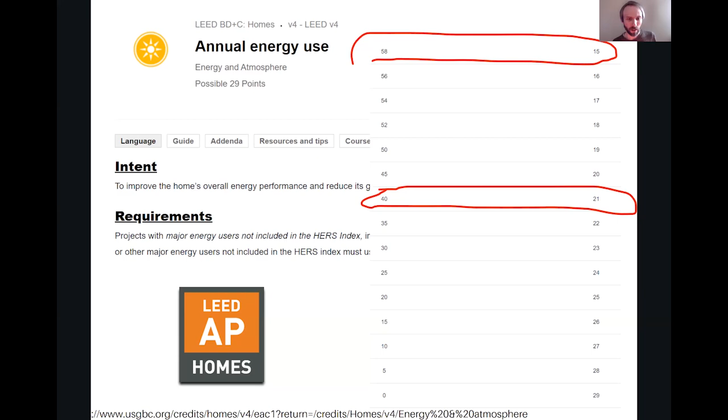There's also the energy rating index, ERI, which is really the direction we're headed now, I believe. And so you can use that interchangeably. Now there's more to it than that, but you can effectively use that interchangeably depending on which agencies you're working with to achieve these credits. And then also, again, a reminder, you have to be Indoor Air Plus certified.

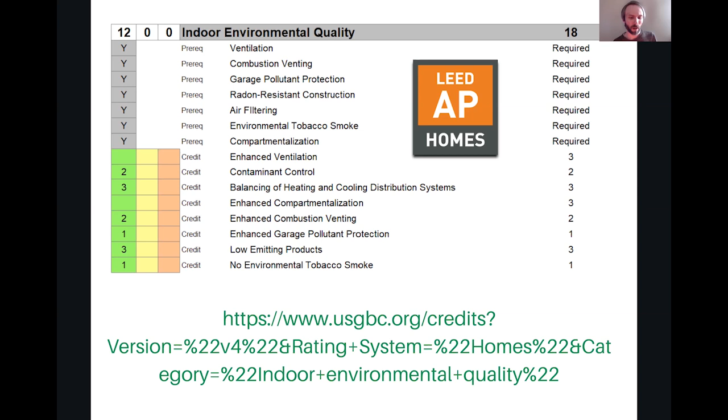So Armando talked a lot about those components. They already pre-qualify you for a majority of all the prerequisites in LEED, as well as several of the credits. So like we're saying, somewhere between 23 to 29 of your points are already there for just doing Zero Energy Ready certification. You're taking care of a bulk of that.

And then also, I believe, Armando, you mentioned water conservation. You either have to pick WaterSense certified devices or pick the advanced water heating design, correct? Yep. So water saving devices, that's going to give you even more points in LEED. So you're definitely well on your way.

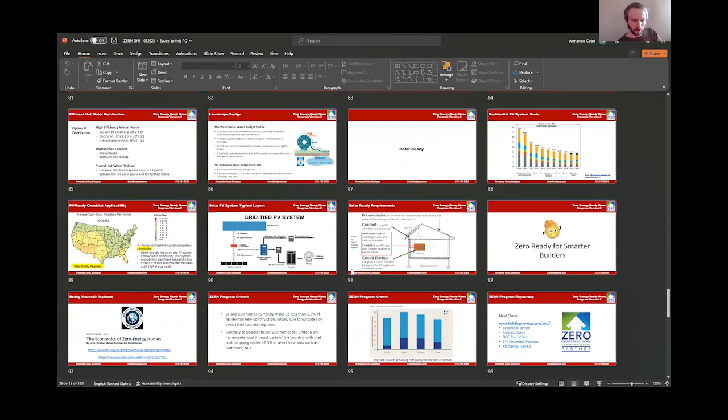Yeah, the 25 - somebody reminded me in a text message this week, it's called 25D. They texted me, 'how do you get 25D?' I said, what are you talking about? And they said, 'Brett, it's the solar tax credit.' Oh, okay. So this credit, you really need to read the rules.

It used to be, when it first came out, that you had several years to claim the credit. So if you put in a $30,000 system, you'd get $10,000 or $9,000 back, and you'd have had 2 or 3 years to do it. I think now it's only a 1 year carry forward - that's it.

So you need to really read the rules, but I've never had any homeowner say they couldn't get their tax credits. That's between the homeowner and the IRS. As far as the builder, I know if you build to rent, you can claim that. If you're in multifamily or some projects like that, you can claim it as a builder. But typically this is usually applied to homeowners.